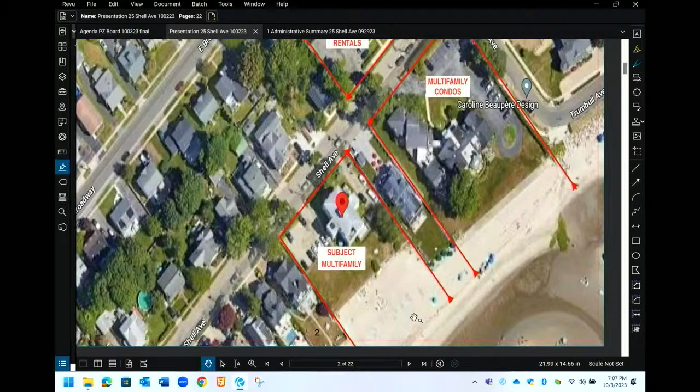As you can see and as you know, the area is primarily single-family residential, but there are some existing multifamily uses, including the subject property, which is a building that dates to 1930, somewhat in disrepair over the years.

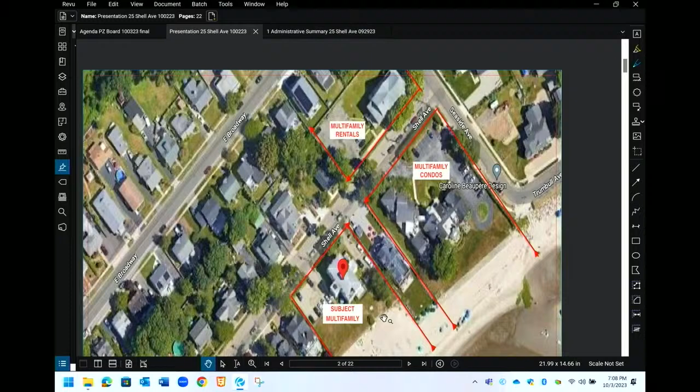The existing structure has 9 units, and back in November of last year, there was a variance application by this applicant to renovate the building but retain 9 units, but that was denied by the Zoning Board of Appeals. So this is a different attempt to redevelop the property.

Mr. Sulkus, if we can go to slide number 3. So we're proposing a new structure, 20 units in one building, 12 two-bedroom units, 8 one-bedroom units.

The one-bedroom units will range from 710 to 839 square feet. The two-bedroom units from 965 to 1,222 square feet. In terms of applications and reviews, we received an approval from the Sewer Commission.

Obviously the property is already connected to sewer, but they allowed us to make some minor adjustments, and that was granted on August 30th of this year.

The Fire Marshal last week, after raising initial concerns, met with the applicant and gave us an approval of the revised plans as revised to September 20th.

John Goucher of the Department of Energy and Environmental Protection reviewed the coastal application, had a couple of what I believe were minor comments, also met with the development team, and the revised plans were submitted and provided to him last week. I have not seen a response from him to the revised plans, so our assumption is that we met all of his concerns.

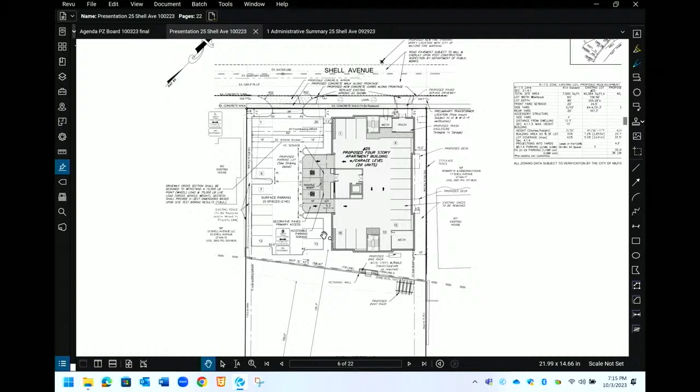The landscaping plan, if we move on, we've utilized an array of native and coastal plant materials. Also, we have taken into consideration areas for snow removal, utilizing plant materials, ornamental grasses, hydrangeas, ones that die back in the wintertime, so if we put snow there, it's not going to adversely affect the landscaping plan. So we took care of that.

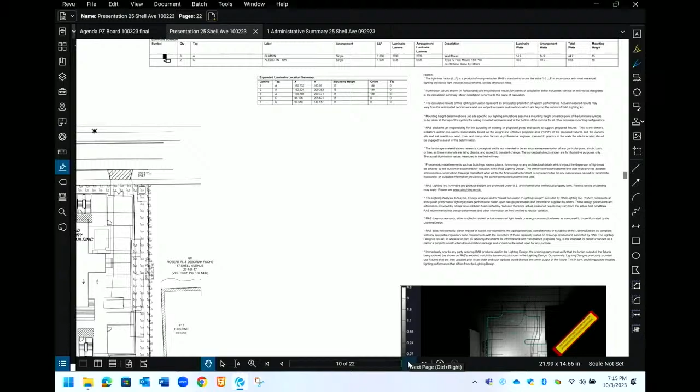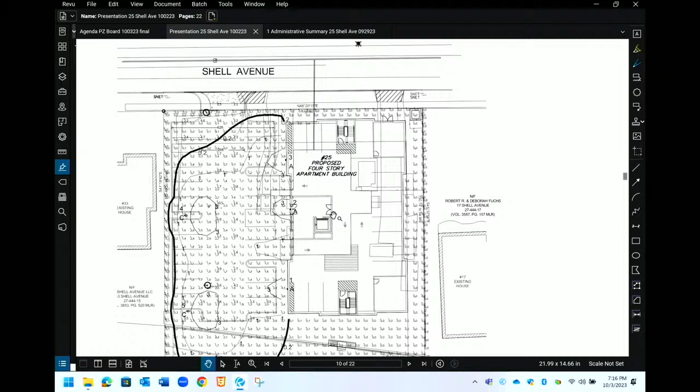On the next sheet, we have a lighting plan, and in the upper left-hand corner, there's a notation that in order to comply with the city's standard of no spillage, we're going to be a little bit light on that corner, but there is residual light from the street lights that would comport with that and make that functional. The site is serviced by underground water, electrical, sanitary, natural gas.

In the comments from Mr. Paluski, we verified the sanitary line that's there. In our discussions, we basically had a workshop with the fire marshal. We had a second workshop with DEEP and the city engineer, and there were some comments that came out of that which have been accommodated with the plan.

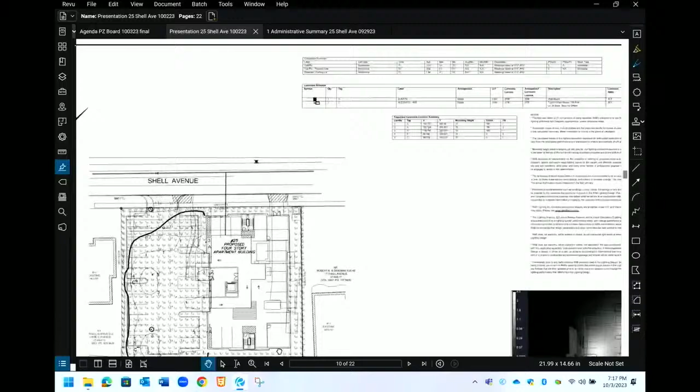One of the things that we did find required, you can almost see at the top of the plan there, that dark spot was an extra fire hydrant that was added and requested by the fire marshal in order to allow for the location of a fire apparatus to hook up to that hydrant nearby and be able to serve the building. So we were able to do that.

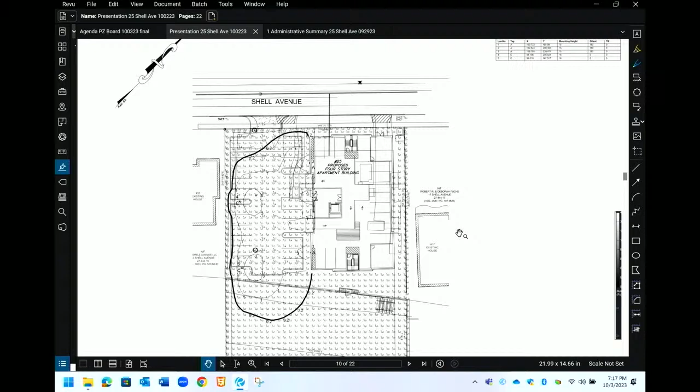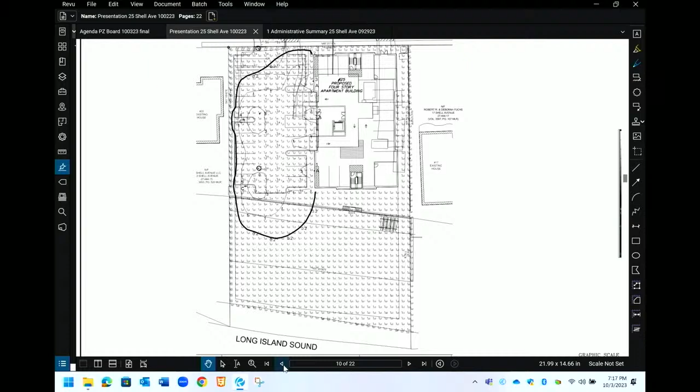There's no change on the site that's going to take place between the retaining wall, the beach, and the high water line, save for just a boat rack, which would be located beyond the 100-foot offset of the mean high water line. Other than that, there's not going to be any activity there except for discharge on stormwater, which Mr. Weiwei will address. So obviously, after meeting with staff professionals, we're confident that there are no safety or health concerns.

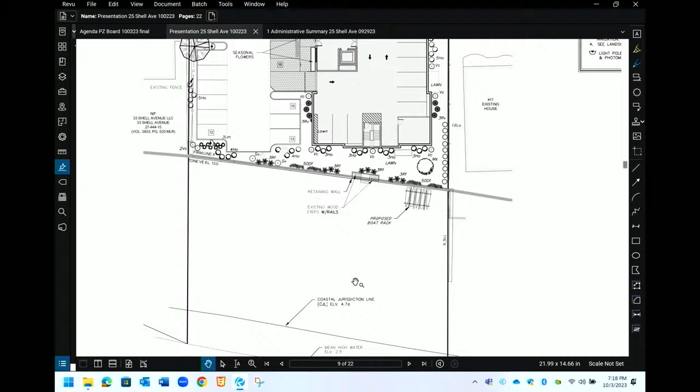All new development shall be in the FEMA Zone X portion of the site. Floor elevations are set well above the adjoining flood elevation of VE 13. We're at 17 and change. The existing building has a half level below, so they're definitely below that elevation. So in this way, we're certainly improving things. It's parking on the ground level. There's a trash room that will be discussed in the architecture that's segregated from the rest of the building use.

Again, the building is oriented in a driveway designed to facilitate access for the fire apparatus. We added a feature of balconies on two sides of the building. There was some discussion about possibly adding balconies on the water side of the building as well. We're open to that, but it's not necessary—that was to add additional access way.

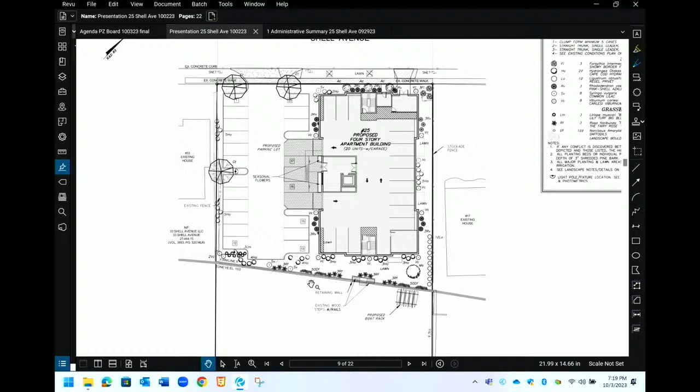So that really is a walkthrough on the plans to give you a good sense of the drainage that has been considered. I'll give our attention to Mr. Bob Wheway. Thank you. You can get back to slide number 4, David. Good evening, my name is Robert Wheway.

I'm a licensed professional engineer and principal with the firm Codespoti & Associates. What I'd like to do is walk you through briefly the stormwater management plan that's been proposed for this development.

For the existing conditions right now, we have the existing building as well as the gravel parking areas that basically drain out to Shell. There's a ridge line that runs through the property parallel to Shell, about 75 feet back from the roadway system. Everything to the front side of that is draining to Shell. Everything to the rear is draining down towards the retaining wall and Long Island Sound.

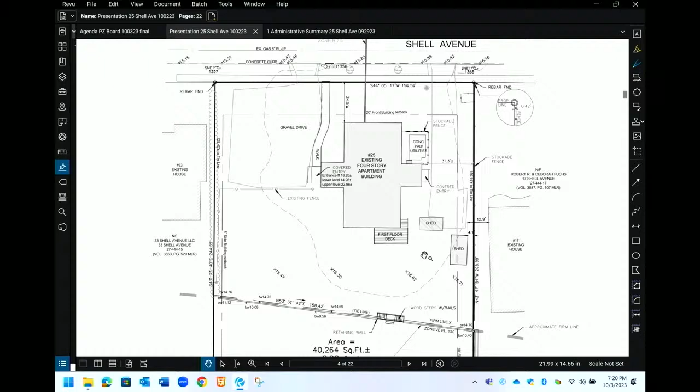All told, right now there's approximately 3,600 square feet of impervious roof area, in addition to the gravel areas on both the left and right side of the properties. Under the proposed conditions, the impervious surface coverage is going to increase to approximately 16,200 square feet. As part of that, you could expect to see increases in peak rates and volumes of runoff, and hence the need for the development of a stormwater management plan, which we've included as part of the submittal package.

Basically, the main goal of the stormwater management system is to provide for water quality enhancements from the runoff from the roof areas as well as the parking areas. There are basically three components in the management system. The first is the collection system, which will basically be picking up all the roof leaders, piping them underground through a roof drain system, and carrying that back to our water quality structure, where it will also be receiving runoff from the paved parking area.

All that flow will go through the pre-treatment, or the water quality structure, which is considered to be a pre-treatment measure. That's a hydrodynamic separator where the water will flow through, and the bulk of the suspended solids and floatables will be removed from the stormwater as it flows through the structure.

The main part of the system is the treatment system itself, which is the gallery system. We've proposed 8 total galleries that are 2 foot high by 4 foot wide by 8 foot long. The galleries have been sized to basically contain the full water quality volume runoff from that tributary watershed area. The water will be collected in the gallery system, allowed to infiltrate down into the underlying soils, and during heavier rainfall events, when the capacity of the galleries is exceeded, it will flow back out.

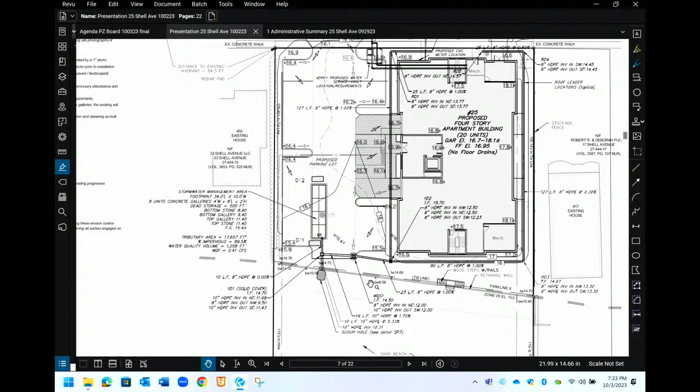The final component is in working in conjunction with the MS4 permit, which the city of Milford falls under. We've also met the requirements for the MS4 by providing stormwater disconnection. As I mentioned previously, the front 75 feet of the property right now flows to Shell Avenue, which connects to the storm drainage system further down the road. By changing the topography a little and creating a high point at the back part of the apron, we're now able to prevent approximately 10,300 square feet of surface runoff from getting to Shell Avenue, directing it instead to the rear of the property and through the proposed stormwater management system.

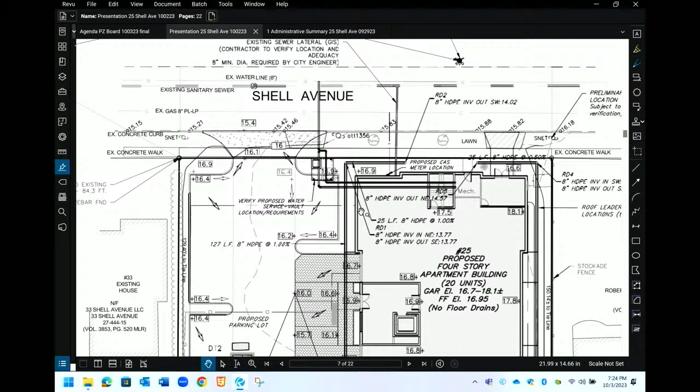So if the stormwater management system is installed according to the plans, it's my opinion that there will be no impacts to the neighbors or to the stormwater for this project, and that there will not be any public health or safety concerns for the project.

We've also provided a detailed soil erosion and sediment control plan, which I believe is on slide 8, featuring pretty much the typical S&E measures that you would find on any other project. We've provided for a construction entrance coming onto the driveway system, and there are silt fences and hay bales that will be provided around the internal storm drainage system.

And that's pretty much it with regards to stormwater. We do have the scour hole for energy dissipation down on the lower side of the retaining wall. So that's a quick overview of the stormwater management plan and the soil erosion control plan.

I think with that, I'll turn it over to Steve Ullman, and he'll enlighten you to the traffic issues for the project. Thank you.

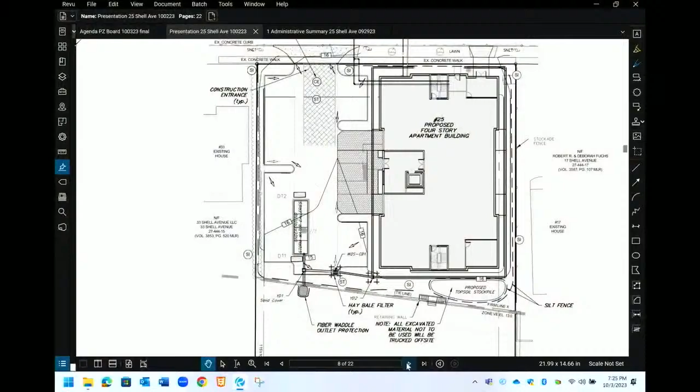Good evening. My name is Steve Ullman. I'm a professional engineer in the state of Connecticut and a professional traffic operations engineer. I'm employed by Benesch Associates of Glastonbury, Connecticut, 120 Hebron Avenue. I've been doing traffic engineering since 1986 - 37 years - in the consulting business.

As has been stated, this site will be served by a single driveway to Shell Avenue, about the same location as the existing westerly most drive. Shell Avenue is a local street approximately 26 feet wide in the vicinity of the site, with parking allowed on the south side but prohibited on the north side. There is no posted speed limit on Shell Avenue. Previous discussions with the police department indicate the speed limit they enforce is 25 to 30 miles per hour.

Sight lines were physically measured along Shell Avenue from the proposed driveway. To the east, the sight line extends all the way to the intersection of Seaside Avenue, so you can see people coming on Shell Avenue. To the west, it exceeds 400 feet, which is the minimum required sight distance for 35 miles per hour, exceeding the reasonable speed on Shell Avenue. The parking on the south side does restrict sight lines towards Seaside, but drivers will pull forward to where they can see, and they can see clear sight all the way to Seaside.

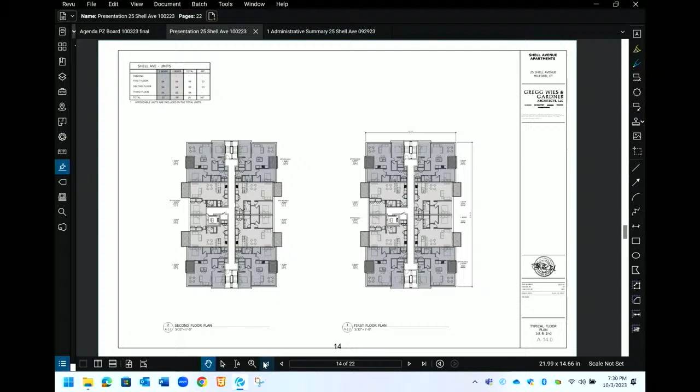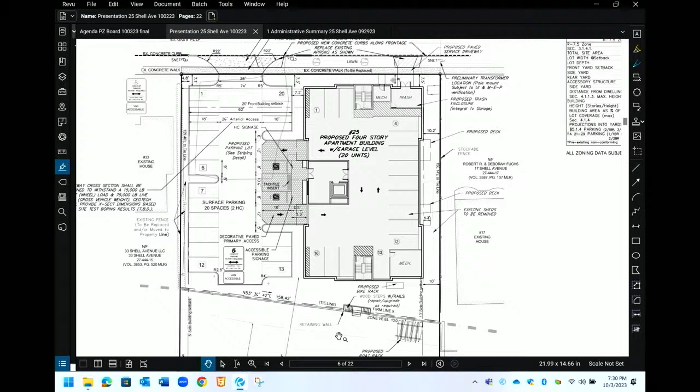So we'll jump into the plans. Dave, do you mind going back to the site plan? Oh, it's beyond, yeah. And if you could, please bring the mic up a little bit. This sound system isn't so good. No problem, thank you, I always have that problem, it's always a little low. Okay, so Dave, would you mind keep going to the architectural site plan? One more, oh, I guess everything's out of order. We'll go back, I guess. There we are, perfect, okay.

All right, so this building is 3 stories of residential over 1 story of parking. The building is designed so that the upper story looks like it's within the roof, so it reads as a 3-story building with a roof structure.

This layout of the plan was something that we just delivered to Dave, where we were integrating the structural layout with the parking, just to show that the parking was going to work. But the basic plan is, from the parking lot, you come into a lobby.

The lobby has an elevator and room for an Amazon area where you can collect boxes, which can also be entered from the parking garage. Then pretty much the rest of the rooms are a mechanical room towards the street to receive utilities, a trash room separated from the rest of the building directly to allow the movement of trash out to the street for pickup, and a mechanical room, which will probably be the sprinkler pump room.

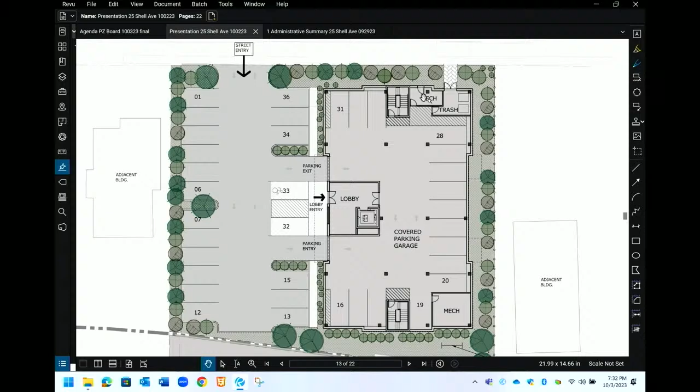There are 2 exit stairs, north and south, one along Shell, one towards the rear. Okay, next slide please.

So the basic layout is an array of 2-bedroom and 1-bedroom units. There are 12 twos, 8 one-bedrooms. The 2-bedroom units, all the units have a sort of open plan with the kitchen, living room, dining area open to each other, and then there's bedrooms.

The 2 bedrooms have, one of the bedrooms has an ensuite bathroom, so the 2-bedroom units have 2 bathrooms that go along with them, but one of them is ensuite, one is open to the rest of the apartment.

Planned amenities include washer, dryers, plenty of storage, closets, just what you would see in a market rate type apartment. Another important amenity is that every unit has a balcony and has access to open space and views from their apartment.

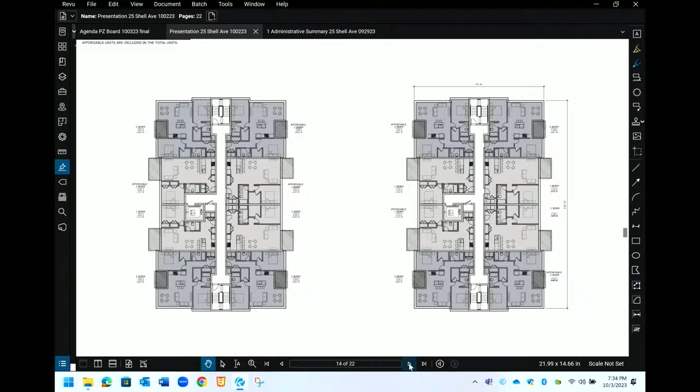The roof, the upper level, what we call the 3rd level apartments, those are all 2 bedrooms, and they have decks that are actually above them. They're on the roof, like you would see with typical shoreline buildings that use the roof to get views to the water. So that's the basic layout of the units.

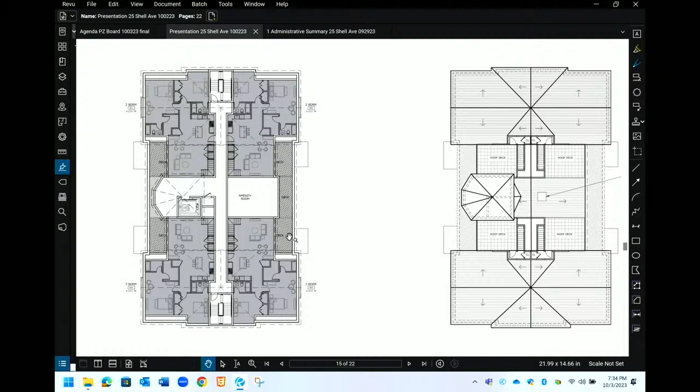We can jump to the elevations, maybe. So we're using a palette or a style here, which I would call Connecticut shoreline. It's shingle style, it sort of takes its cues from a number of the surrounding neighborhoods and buildings.

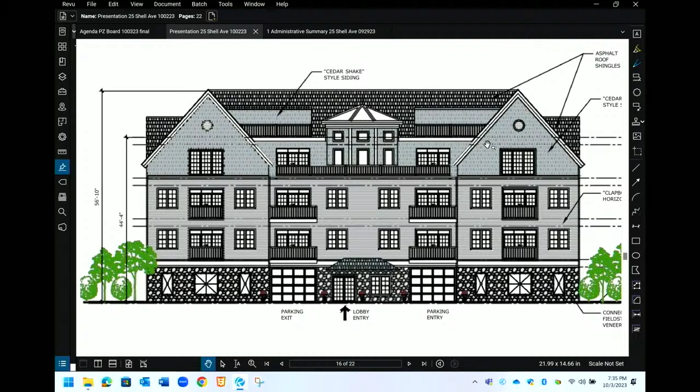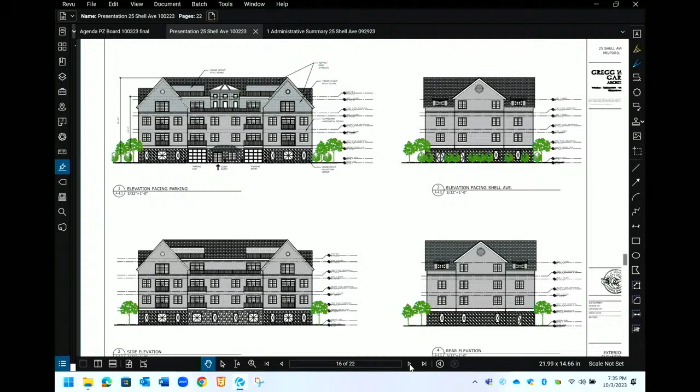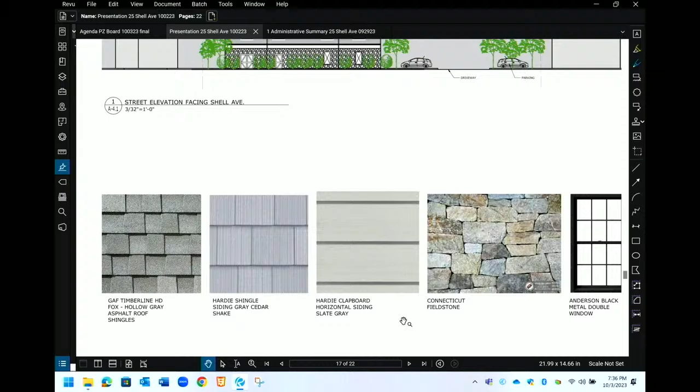Oh, let's first talk about the materials. I gave you a quick overview, but we have areas of shingle up above in the gables. We have clapboard in the body of the building, and we have the field stone along the base, and the windows will be a black frame, divided light style window.

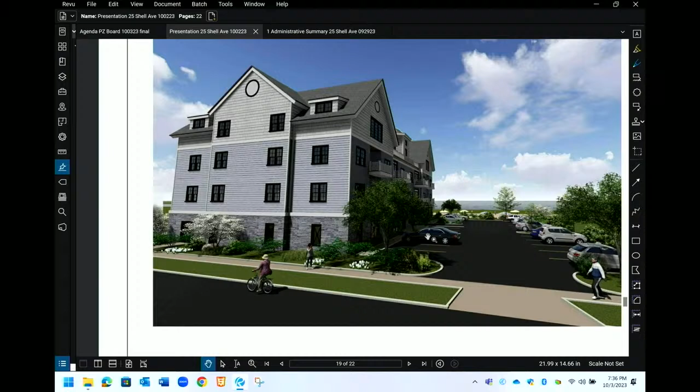But you'll see that the third level is really embedded in the roof structure, and that was all specifically to keep the scale of the building lower.

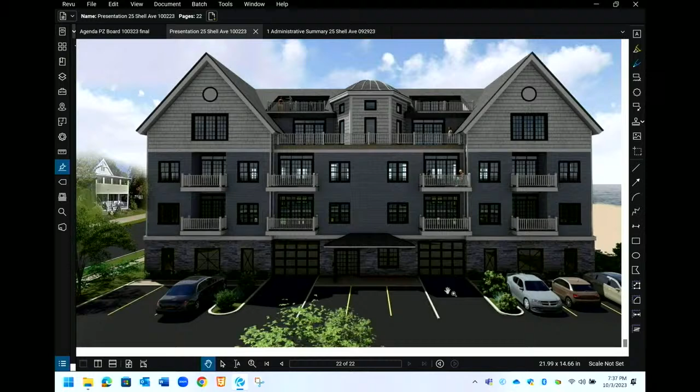This is the view from the parking lot, which would be, I guess, a westerly view. The tower unit is actually the elevator. There are some amenities in the building upstairs - there's going to be a community room plus a deck that's just outside the community room, which will be open to all the tenants.

Other amenities include some lawn where folks can hang out, and then of course there's the beach, which is right there for use by the tenants.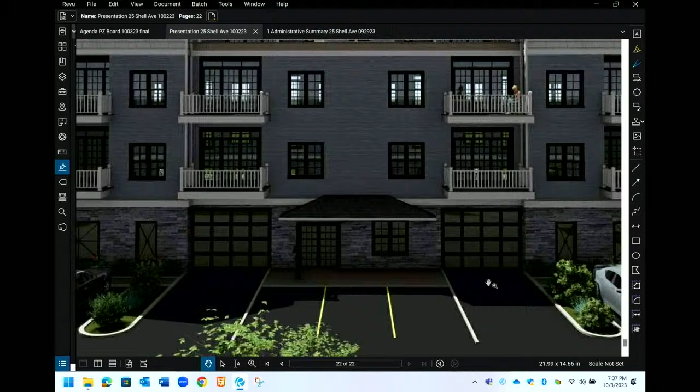One thing I wanted to point out is that the garage doors, which are glass and aluminum frame, the fire marshal required us to have those doors automatically open in case of an emergency, so that there would be immediate access by fire personnel into the building. Also, on the roof, we're giving them a path and access to the roof through some attic levels that come right off those two staircases at either end. So we were responding to the request to make this building as safe as possible.

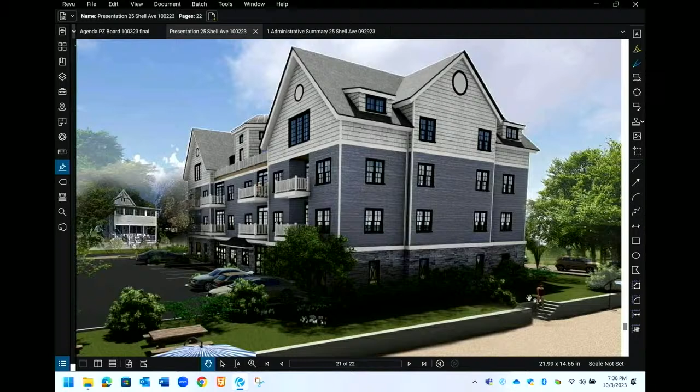Other fire safety features are: it's a fully sprinklered building, and there's going to be a standpipe in the stairs that faces Shell Avenue, so fire personnel will be able to hook up there and get water to various levels.

In terms of energy efficiency, this building, by necessity, has to meet the current Connecticut energy code, which basically means the state energy code now is equivalent to LEED Silver. That covers insulation, it covers the issues around air infiltration. You have to have an airlock for coming in. So this is going to be essentially a state-of-the-art building based on Connecticut code.

Generally, this was a process where we were meeting with the fire marshal and trying to get a good handle on any potential safety concerns. It's my professional opinion that there will be no health or safety concerns in this building.

And that summarizes, that's my presentation. Thank you.

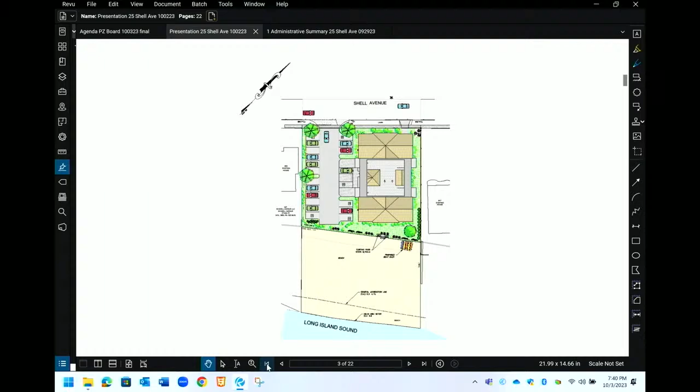Just to conclude our initial presentation, I will say that I hope you have the impression that the site plan does not present any health or safety issues, reviewed and approved basically by all reviewers, city staff. I hope you agree it's a nice design, and the amenities are going to be enjoyed by all tenants. So I'll stop here with our initial presentation. Obviously, after public comment and questions, I may have some closing remarks, but that's what we have to present tonight, Mr. Chairman.

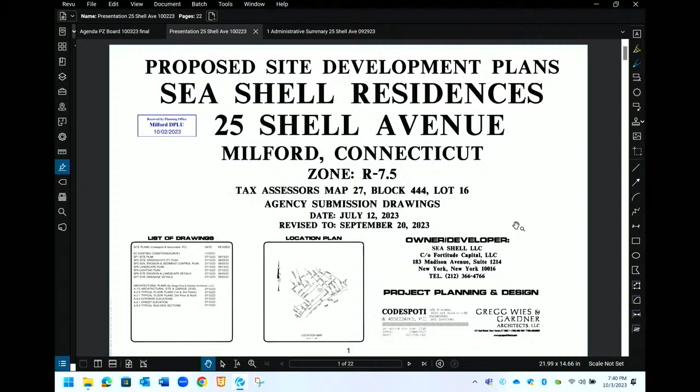Are there any questions or comments from the board? Mr. Sadi, if you'd wait. David, would you weigh in as you see fit?

Generally, I think the application is very good as 8-30gs go that we have seen. But there's one issue, there's a couple of issues that need to be brought to your attention. I could read my report in its entirety, but it has been submitted for the record. I want to talk about unit equivalency, which is important in an 8-30g application.

So unit equivalency: there appears to be a lack of unit equivalency for the fourth floor units as compared to the second floor and third floor units. And just for clarification, you've heard floors, you've heard stories tonight. I'm putting this in here as our regulations have it, because we don't recognize stories, we recognize floors. So there appears to be a lack of unit equivalency for the fourth floor units as compared to both the second floor and third floor units as currently proposed by the applicant.

These units are 1,222 square feet compared to the other two-bedroom units in the building, which are 965 square feet. These units also include private rooftop decks on the fifth level, in addition to balconies found on the fourth level. The fourth floor also contains an amenity room that may serve the entire building, but appears to be conveniently located for the fourth floor tenant use.

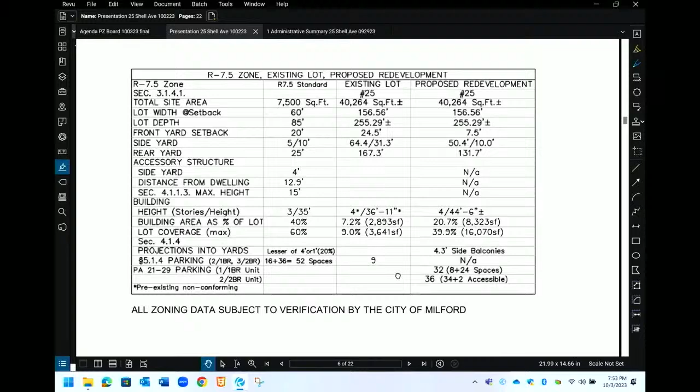So now your client is proposing building 12 two-bedroom apartments and 8 one-bedroom apartments. So how many cars would theoretically be there at night? I don't know how many cars would be there. I think we are at a parking ratio of about 1.75 per unit. That's pretty generous. We have two spaces per two-bedroom unit and one for each one-bedroom unit, plus handicap spaces. So hypothetically, there could be 32 people sleeping in this building in the future with 12 two-bedrooms and 8 one-bedrooms.

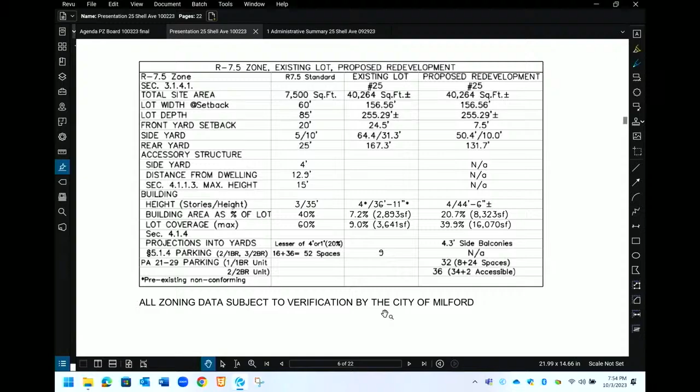I don't know the answer to that. It's a hypothetical. Yes. And you're going to have 36 parking spaces in this new facility. Is that accurate? Correct. So right now the ratio is 2 parking spaces per person, but now it's going to be 1-to-1. The ratio is we have 36 spaces for 20 units.

That's, but 20 units doesn't mean 20 people. 20 units could be 32 people, correct? You certainly would probably have more than one person per unit in the two-bedroom, but the total number of people in the building, 30 is a reasonable estimate, but I don't know.

Assuming full occupancy, there could be 32 people living in this structure in 18 months with only 36 parking spaces. Is that accurate? You're asking me to predict. Is it an accurate prediction? It's a good ballpark estimate, yes. Does your client believe that a structure with 32 potential tenants and 36 parking spaces has a sufficient number of parking spaces? Yes, we do. Okay, thank you.

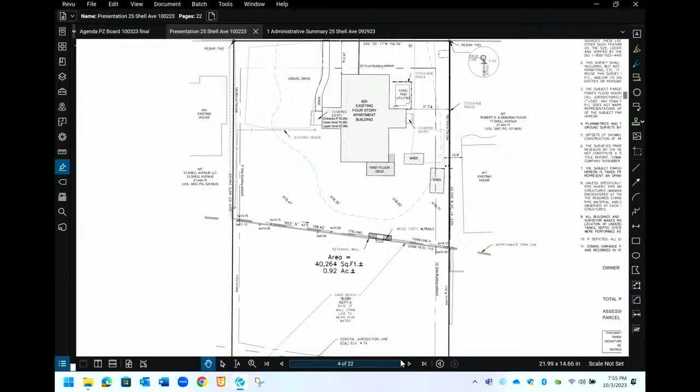Yes, thank you. I just wanted a clarification on that. One other thing, I'm not too familiar with the drainage system. I'm wondering if we could get a little more explanation on that. What are you looking for specifically? Just a general explanation. You're taking the rainwater from the gutters and the leaders into a holding tank. Is it being treated there before it's released into the sewer system?

Yes, the runoff from the roofs will be collected by the gutter system, transferred to the leader system, which ties into an underground roof drain pipe system. That piping connects to the hydrodynamic separator, identified as WQS1 on the plans. It works on a swirl concentrator: the inflow comes in, separates out particulate matter and floatables, and the clean water discharges from the separator into the yard drain, then disperses into the galleries. If heavy rainfall exceeds the capacity of the galleries, flow is directed from the yard drain to the outfall on the riprap pad on the downhill side of the retaining wall.

Applicant has the floor. Thank you, Mr. Chairman. For the record, my name is John Knuff. I'm an attorney with an office down the street at 147 Broad Street, and I'm here tonight on behalf of Connecticut Post Limited Partnership. They are the owner of the Connecticut Post Mall, located at 1201 Boston Post Road. It is in a shopping center design district, and Connecticut Post is a Centennial entity that owns 36 other centers across the country, many of which Centennial is actively reimagining as envisioned here. With me this evening are Whitney Livingston, who's the president of Centennial, and Michael Platt, who's the vice president of mixed-use development. You'll be hearing from each of them in a few moments.

This is an application to amend the Milford zoning regulations, in particular the shopping center design district regulations, along with some related provisions regarding parking. This is only a regulation amendment, not a special permit application. We'll be showing you some concept plans in a few minutes, but this regulation simply paves the way for us to submit a full special permit and site plan application subsequent to this application.

This application proposes modest, but nonetheless vital changes to create the opportunity for Centennial to make an investment of tens of millions of dollars that would revitalize the mall and make it relevant again by offering the type of shopping, dining, and entertainment experiences that today's consumers seek out. And that word experience is important because it's the one thing that online retailers cannot deliver.

And that's really the key: to take a mall that's built for consumers in the 70s and 80s, which hit its prime probably 20 or 30 years ago, and make it a real destination again. A place that people actually seek out, want to explore, where they want to live, and be excited about again. And in doing so, maintain the mall's status as Milford's biggest taxpayer, maintain the mall's thousands of jobs, and provide critical housing alternatives. The shopping center design regulations create a very large envelope in terms of uses and bulk requirements.

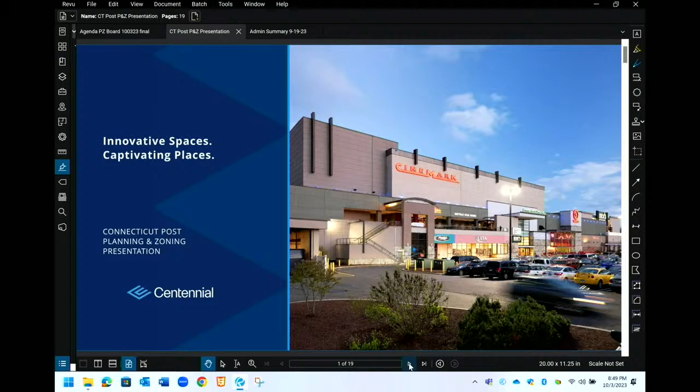We propose to modify the regulations that govern the design of multifamily buildings to permit a far more attractive and contemporary design than what is currently permitted, in a format that is, quote, sensitive to the context of the area. That's a quote from your proposed POCD.

We propose to permit multifamily buildings in 3 phases of 250 units per phase, the first of which requires an engaging, mixed-use, pedestrian environment with first-floor retail and restaurants, outdoor dining with direct proximity to a plaza and to the mall. We propose that 10% of those units will be deed restricted as affordable.

Our last application, we proposed none. In our discussions with you, we raised that to 5%. And rather than get involved in a negotiation with you, we wanted to go the extra mile and propose the full 10%, which has become a standard across the states.

We propose to create a plaza that will host a variety of outdoor events, whether a farmer's market, arts and music, and children's activities. We propose to add other commercial uses, such as medical office, personal services, schools of every type, and outdoor entertainment.

We propose regulations that reflect broader city and societal goals of sustainability, affordable housing, and acknowledging historical context. We propose doing that in a format that applies only to parcels in the shopping center design district that exceed 50 acres. There are only 3 parcels in the shopping center design district, and the mall is the only one that exceeds 50 acres. So there's no reason for any concern as to what may occur on the other properties.

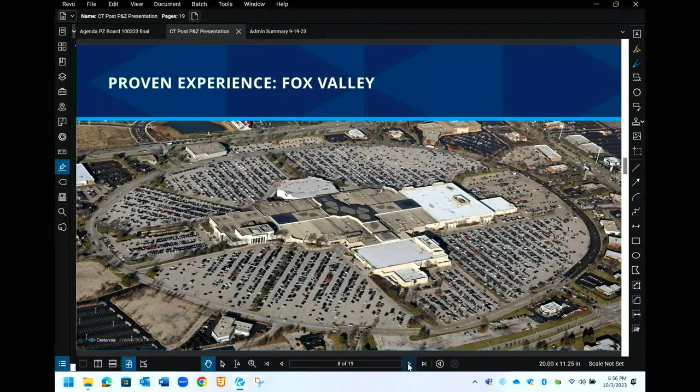Now you get to see Fox Valley fully reimagined. Similar to what we're proposing for Connecticut Post Mall, this project was planned in partnership with the City of Aurora in 3 phases over 7 to 10 years. We have successfully delivered phase 1 of the multifamily of this project, and after its immense success, recently broke ground on phase 2. With the addition of an outdoor activated park and now having created a true 18-hour-a-day destination, the mall itself is also rebounding.

Over the last year, sales of the retail of the project have increased over $100 a square foot. We have also seen more leasing velocity at the project than we have in the last 5 years because it's now more relevant to tenants and consumers. All of this contributes to the sales and property tax revenue for the City of Aurora, in addition to delivering a vibrant and viable long-term project for the community.

So why should Milford care about Fox Valley? Here's why. Fox Valley is where we are in Milford today. In Milford, we are entrusted with one of the largest parcels in your city. We are entrusted as the largest taxpayer in your city. We are entrusted with thousands of jobs in your city. And as discussed, we are entrusted in helping preserve the environmental future of your city. We take all of those responsibilities very seriously everywhere that we do business across the country. And that's why Fox Valley is relevant to Milford.

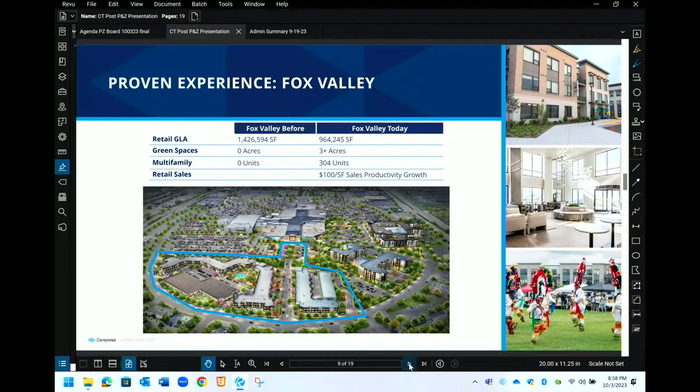We wanted to give you a concrete example of where we are doing what is best for the community, for the project where we do business, and with the experience and the team and the platform that can do exactly that for Connecticut Post Mall and Milford.

And lastly, as I'm sure you will agree, a big part of benefiting the communities where we own centers is the taxes that we pay to fund all municipal services.

The value of the mall, like all commercial real estate, is directly tied to the rents that tenants pay. Despite our extreme efforts, we have lost 22 national tenants totaling 300,000 square feet at Connecticut Post Mall since 2019. Most recently, Ulta left the mall to go to Orange. As a result, we have paid more than $250,000 less a year in property taxes. Unless we work together, this decline will continue.

By redeveloping the mall as we envision and have proposed in this regulation amendment, together we can begin the rebound. We can maintain our position as the city's biggest taxpayer. We can create jobs, we can add millions of dollars of discretionary spending throughout the community, and we can make the mall an exciting destination again.

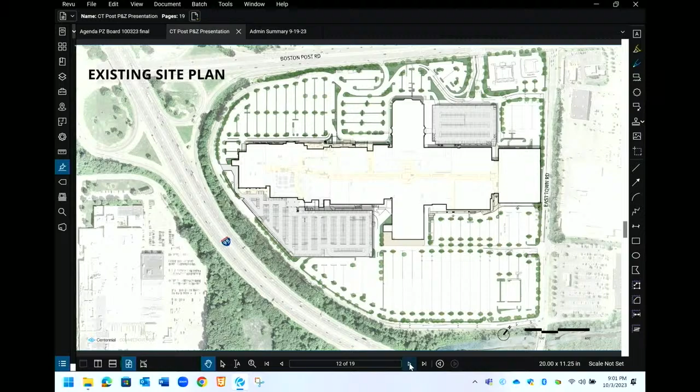So what are we proposing? Well, as Whitney mentioned in her slide, the right sizing of the mall is where it all starts. And then the goal is to redeploy that real estate in a way that is much more relevant to today's consumer. If we can go to the next slide, David.

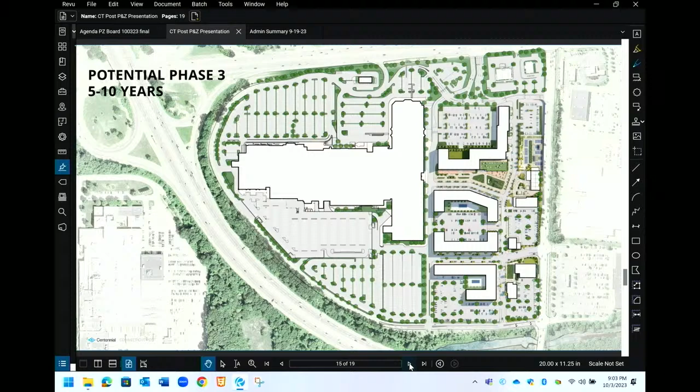If we flip to the next slide, David, there are a couple of renderings. We kind of came down into that new grand outdoor public space. You see green spaces, places for rest and relaxation, and through the course of our platform, we will program that event space with numerous events every year. And you've got the very vibrant edges that really drive the traffic and the energy to that plaza.

A great new opportunity for outdoor retail. We have just a little bit of that today facing Post Road. That is the sort of environment that retailers are looking for today, and being able to offer that will allow us to attract some of the best and brightest retailers of this era.

And then, not to be forgotten and clearly very focused in this rendering, a grand new front door for the Post, really anchoring that end of the shopping center and driving traffic both into the shopping center and from the shopping center to the plaza, creating that ultimately very integrated and very synergistic redevelopment.

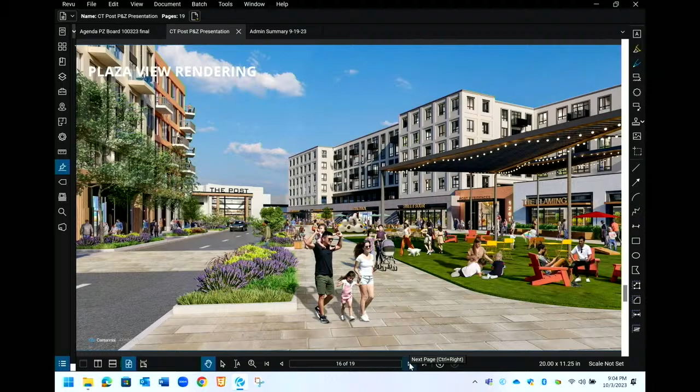The next slide shows the opportunity to host events. We envision farmers markets here, as you see depicted in this slide, and again the already mentioned art festivals, movies in the park, etc. The ability to really program this plaza from building face to building face as needed, and really drive the scale of this plaza larger as needed, letting it flex to handle multiple different events throughout the year.

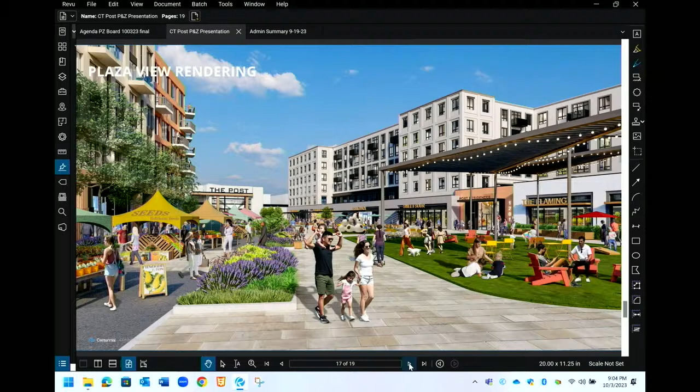The reason why we want to show you those concept plans is so that you understand what it is that the regulations are driving towards. So with that, I've handed out a copy of our regulation amendment application. I've also, for the record, provided a copy of a PowerPoint. I assume that you've all reviewed the regulation amendment. I won't go through every word, but I do want to give you at least the concepts and to demonstrate to you that everything that we've shown you this evening is in fact embodied in the regulation amendment itself.

As I said, we are proposing what I call modest but very critical changes. What the regulation does is create a new section, 3.9A.1. The shopping center design district regulations are 3.9.1. Rather than reorder the entire book, after consultation with David, we decided to make a subset of the shopping center design district and call it the Shopping Center Design District SCD 50. That stands for parcels that exceed 50 acres.

So very quickly, I'm going to run through this, if you want to follow along with the copies I handed out. The purpose of the 3.9A.1 Shopping Center Design District SCD 50 is to apply to parcels consisting of 50 acres or greater, located in the shopping center design district. If there's any conflict between the two, this one prevails.

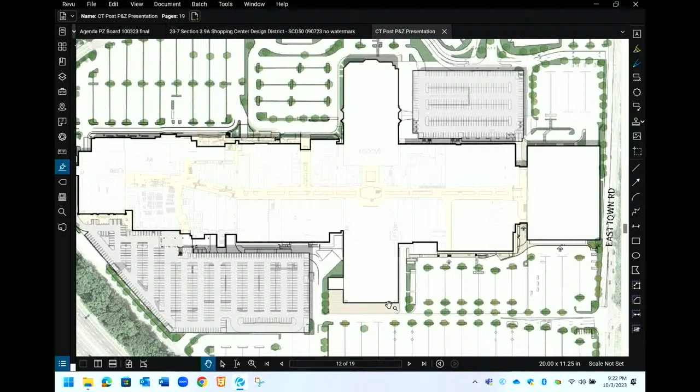So this is obviously the existing mall. The main entrance is on Boston Post Road, at the top of the page. And there are two entrances to the mall from East Town Road. Okay, go to the next one, David. Actually, there's currently three from East Town Road. So the main entrance is still on Boston Post Road, but there will be other entrances available on East Town Road. This creates the front door to the mall.

Can you show me on the Post Road where the entrance is? Yeah. That's still the main entrance? Okay, that's going to remain the main entrance.

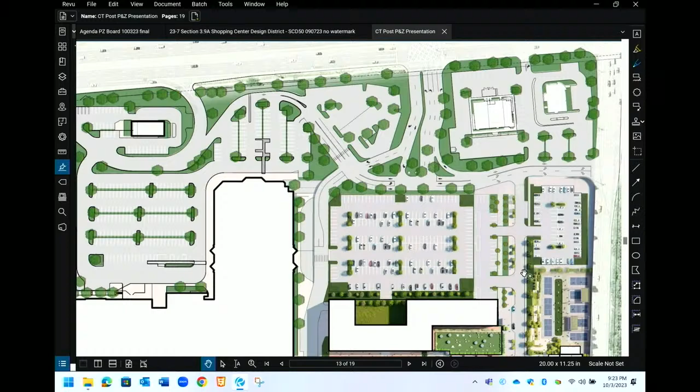Okay, if this is approved, are you going to drop your lawsuit? Yes. If you're talking about the regulation amendment lawsuit, yes, 100%.

Good evening, Attorney Neff. There's a lot to like here. I think there's an opportunity, however, to get more than 10%. I understand it was 0 and you've gone up to 10% affordable. People working at the Post Mall—this would be a perfect place for them to live. They may not even own a car, so that takes care of the spaces. I have no problem with 1.25 spaces per unit, that's perfect. I would only suggest if we could increase the affordable housing, I think this would be much more attractive. Definitely, this is needed. I'm not being negative here, but just a suggestion.

Understood, and it's not the first time we've heard it. But one thing we didn't want to do—it may surprise you that applicants sometimes will say, let's use the subdivision as an example, gee, I really want to get 20 lots, but I'm going to ask for 25 because the commission is going to make me lose some, so I'm not going to ask for 20 because then I'll only get 15, so I'm going to ask for 25. We didn't do that. We acted like grown-ups, frankly. We put our best foot forward. We can do 10%, and we literally cannot do more.

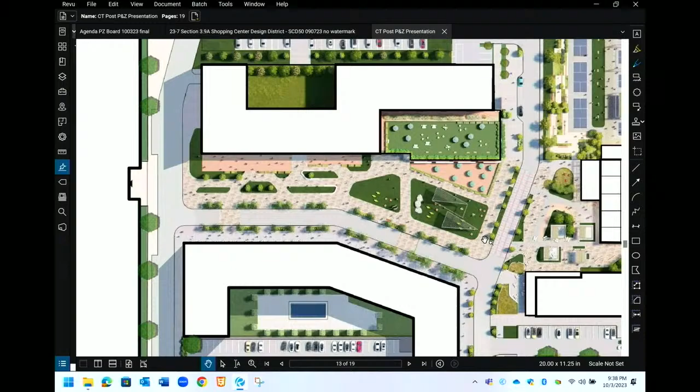So again, on behalf of the city, I stuck it out tonight. I did go in and have my jelly beans to get a little sugar boost. But I came to ask you, as your mayor, support this. Thanks, ladies and gentlemen. Thank you.

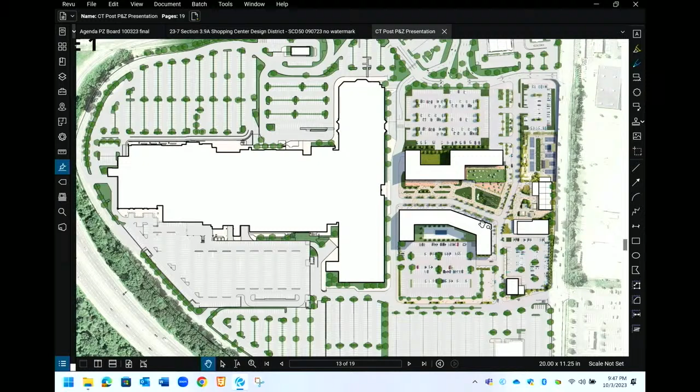Another thing concerning the general plan of development - you're trying to keep people there, and that's pretty good, but they're kind of on an island out there. If you wanted to walk or ride your bike, for people living in those apartments, you really can't escape without getting in a car or maybe a bus. You could try to get to Milford, but you'd have to cross over the on-ramps and off-ramps on 95, and that would be tremendously dangerous. So whether there's any plan to help those people get around other than by automobile would be another issue to raise.

And I think that's what I wanted to say. Thank you for your comments.

Hi, I'll be quick, it's been a long night. My name is Teresa Eek, I live at 47 Point Beach Drive. I'm really excited about this project. I'm certainly in favor of the zone change.

We need more housing, we all know that we need more housing. This goes a long way towards addressing that need. And we need housing for people who work here, people who take care of our kids, take care of our elderly, work in our grocery stores, teach our kids. This would absolutely help.

Because this is a new build, and I'm really excited about the sustainability aspect, it would be lovely if the housing was also accessible. None of us ever knows when we're going to end up in a wheelchair. So accessibility would be great. I think this is a great way for Milford to demonstrate that we can be a leader in this kind of housing. I think other communities are going to look at us and say they did a pretty good job there, we could do that too. So thank you, thank you much.

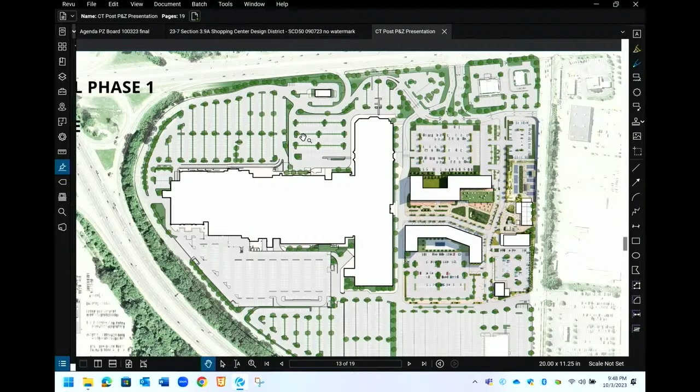If the applicant would like to take the floor again, that's your turn. Thank you, Mr. Chairman, I can be very brief, and I certainly appreciate all the positive comments by members of the public, as well as the positive letters that we received over the past couple of days.

You're talking about density, this is the place to put it. Again, going back to your own reports, this is the place to put it. In terms of city services, we plow the snow, we do the garbage, we do all that. And the numbers that we gave you in terms of increase to the bottom line, in terms of taxes to the city, those are supremely conservative. It takes into account any municipal services that may be provided. So everything the mayor said with regard to the positive tax impact takes into account the modest amount of services the city would be providing.

So again, we very much appreciate all your time and attention over the years, and we look forward to continuing the dialogue and the partnership. Thank you. Any questions or comments from the board? Mr. Sadie.

Thank you very much, I appreciate all the comments that were made on the issue of affordable housing. I'm asking that we don't make a decision tonight for two reasons. We have one less member of the board before us. I think we should be given the ability to look at the previous materials. We may not have the memory that Attorney Nuff does, which is just to find where we are. And I have concerns about the exact language of two sections.